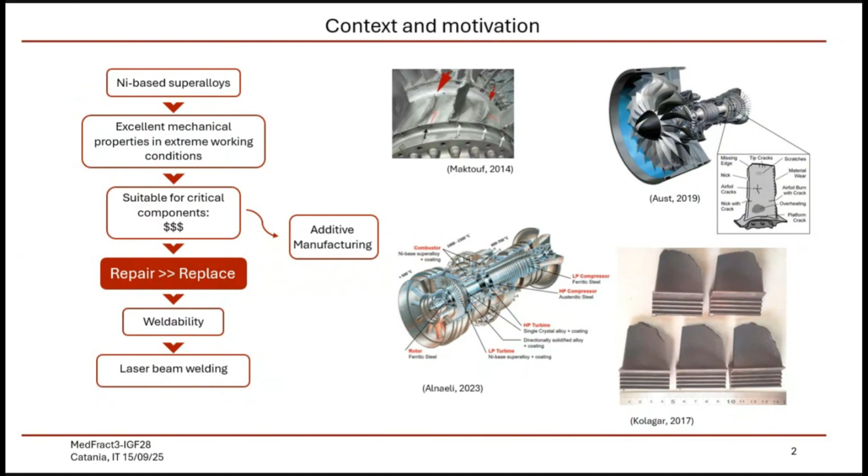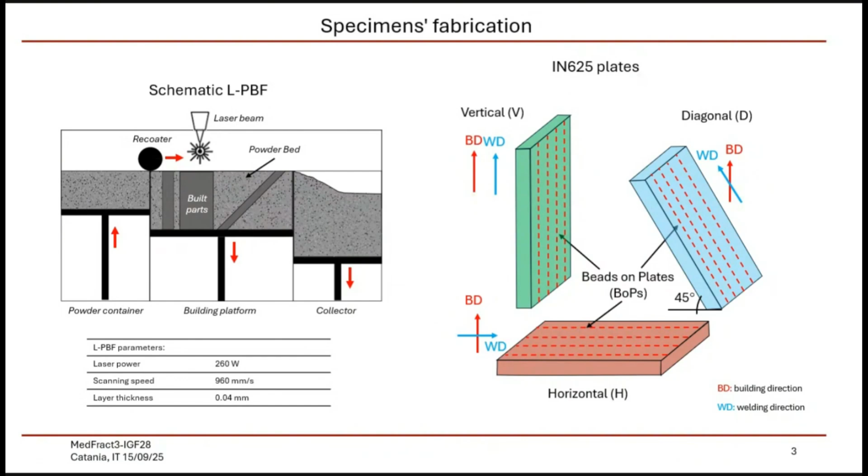And the 3 plates that we use were printed in 3 different building orientations: vertical, horizontal, and diagonal, with a 45 degrees inclination, which is the threshold to avoid support materials. On each of these plates, 4 different BOPs, beads on plate, were welded using laser beam welding.

So how were the process parameters chosen? 4 different combinations of parameters were defined with 2 factors, laser power and welding speed, and a 3rd factor, which is the power modulation. And for each factor, 2 levels were chosen. So for the sake of simplicity, we can say a maximum and a minimum value.

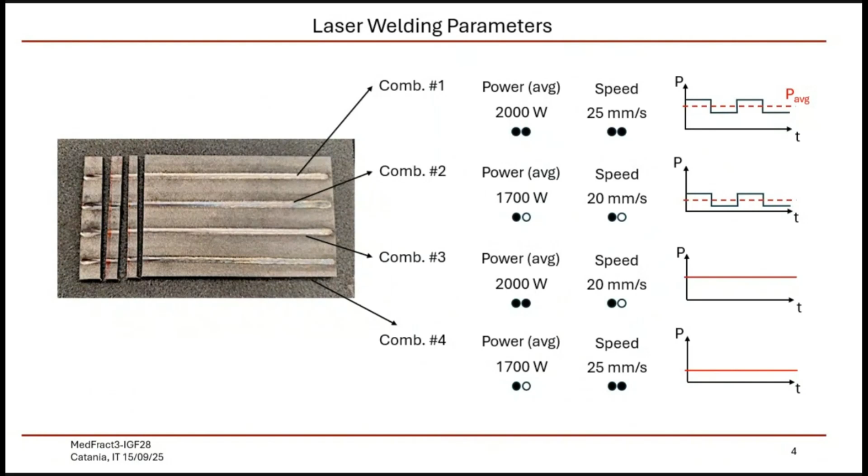In a nutshell, combination 1 has maximum power, maximum speed, and modulated power. Combination 2, minimum power, minimum speed, and modulation. Combinations 3 and 4 are in continuous mode, which means constant power. Maximum power, minimum speed for combination 3, and minimum power, maximum speed for combination 4. So we have 4 combinations of parameters, 3 plates, 3 building orientations. This gives us 12 different cases to study.

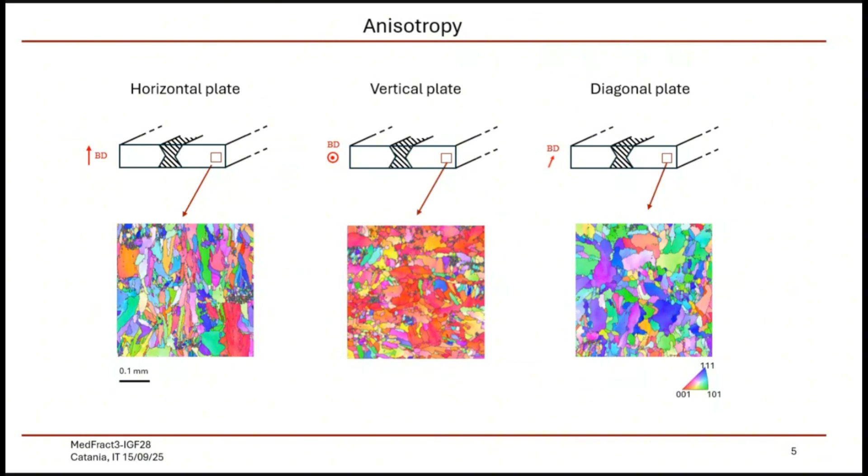And you see in the horizontal plate, we have columnar grains, elongated grains growing along the building orientation, quite long, while in the vertical plate, we have a more homogeneous distribution, and most of the grains are color-coded with red, corresponding to the 001 orientation. And then the diagonal plate has a situation which is halfway between the horizontal and the vertical plate.

What is important to say is that the joints that we observed, all the regions that we observed, also with microscopes, are of good quality. So limited amount of porosity, some rare liquated grain boundaries, but no solidification cracks and no massive defects due to the welding process. So this was the important first result.

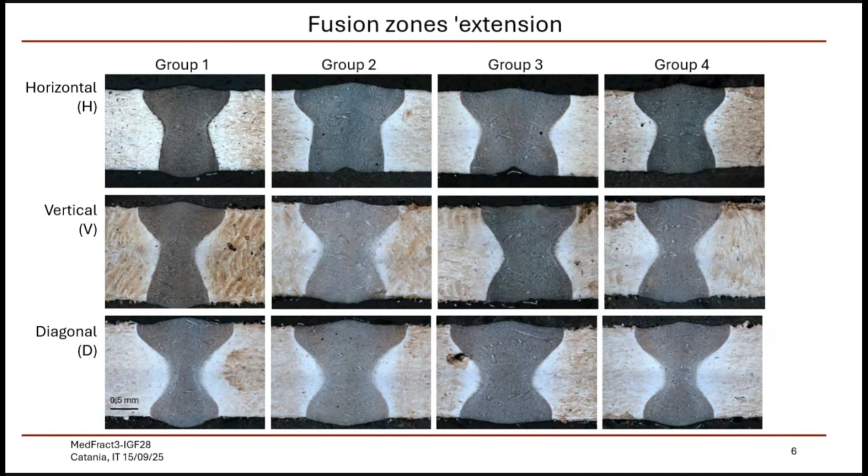Here we are comparing the fusion zone extension because often this is an indicator that is used to make comparisons between joints. So if we transform this matrix into a bar plot, we can see if there are some trends that relate the fusion zone extension to the parameters that were adopted.

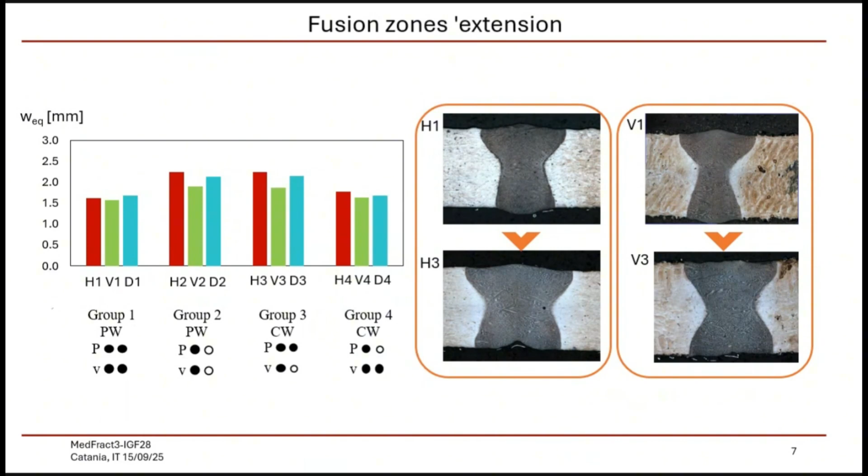And here you can see there is a trend related to the process parameters, but specifically to the welding speed. Actually, laser power and power modulation don't give a great contribution, not as much as the welding speed. And as you see, the lower the welding speed, the larger the fusion zone extension.

To restrict the field of investigation, we decided to study all the BOPs in group 1 and in group 3. So the main difference is the welding speed. Performing EBSD analysis on the cross-section of the fusion zone, interestingly, the structure of the fusion zone is the same. It depends neither on the building orientation nor on the welding parameters. So we have these elongated grains growing from the boundaries of the fusion zone towards the middle of it.

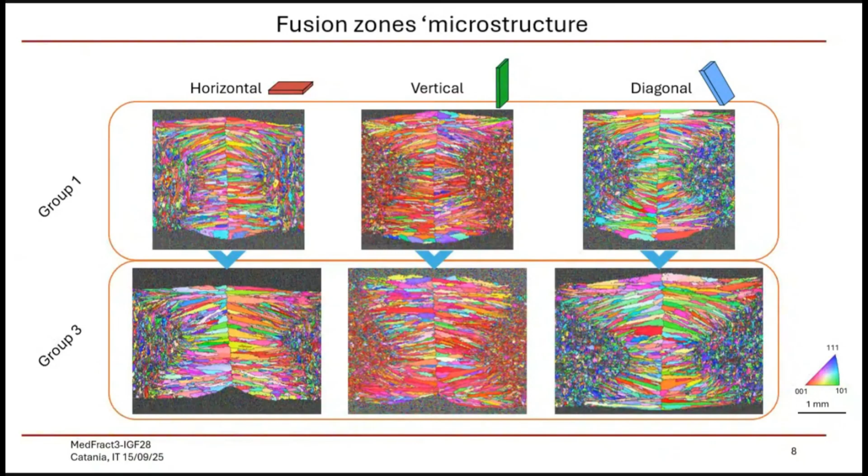But for example, you might know that when the welding speed is too fast, you might have the formation of equiaxed grains in the middle of the fusion zone, but we don't see it. So it means that within this range of process parameters investigated, we don't induce strong differences in the fusion zone microstructure, and not even on the microhardness.

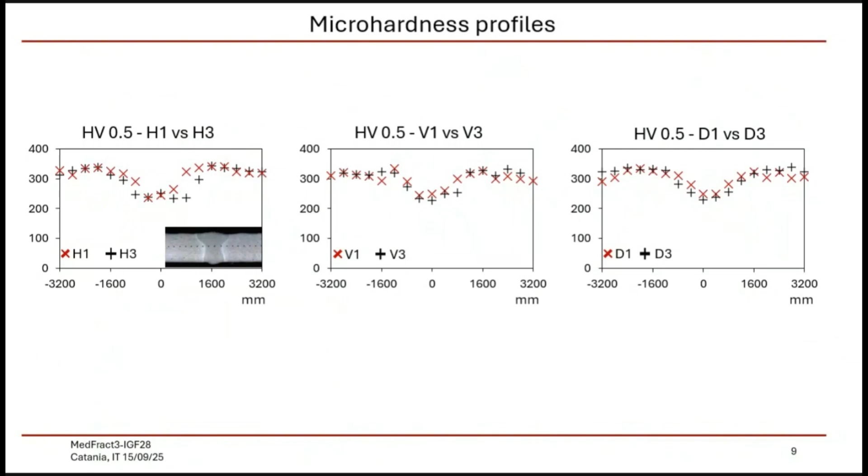These are plots comparing microhardness profiles taken from the middle of the cross-sections of all the BOPs of group 1 and group 3. So again, the main difference is the welding speed. And again, the profile doesn't change, it is not affected by the building orientation, and it's not affected by the welding process. The average of the parent material is 320 HV points, which is higher than wrought material because of the fine microstructure. And we have a drop corresponding to the fusion zone, and this is mostly related to the change in the grain size.

Some final considerations about the possible presence of secondary phases. Here we have a micrograph of the dendritic structure inside the fusion zone. First of all, you can see some circular pores that are probably related to trapped gas because of their morphology. And then you see there are some shiny particles in the interdendritic areas. These are claimed to be, in the literature, Laves phases or MC carbides, mainly niobium carbides, considering the alloy.

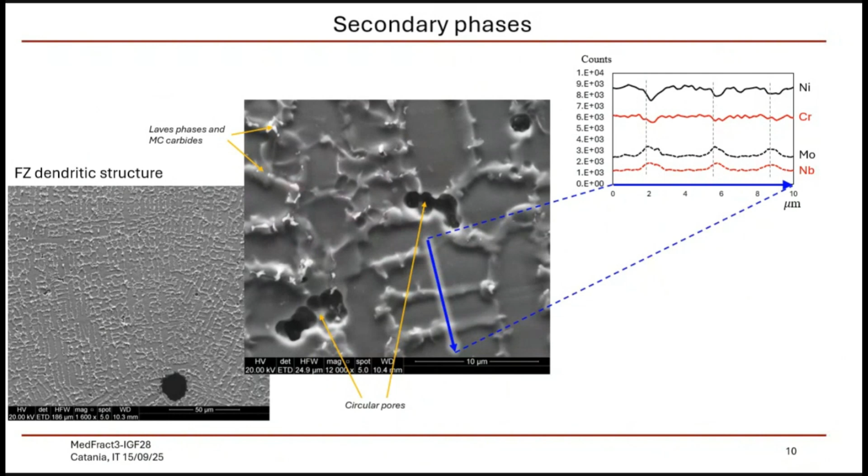And indeed, with EDS line scan analysis, we could see that in the interdendritic area, we have depletion of nickel and chromium and richness of molybdenum and niobium. So we decided to investigate these phases deeper with a TEM investigation. As you can see in this schematic, the samples were taken from the horizontal plate from the top surface, including also the fusion zone of the first BOP. So we have two samples, one from the parent material and one from the fusion zone.

In the parent material, we found the typical cellular structure, typical of additive manufacturing components. But this structure is completely removed in the fusion zone because the welding process completely resets the microstructure. But indexing diffraction patterns, we realized that only gamma phase is present, so we don't have any great precipitation of secondary phases, except for some particles, but they were quite rare.

So these dark globes in the parent material and these lighter grains in the fusion zone are rich in niobium, but too small to get a precise indexing of the diffraction patterns, so we couldn't identify them yet.

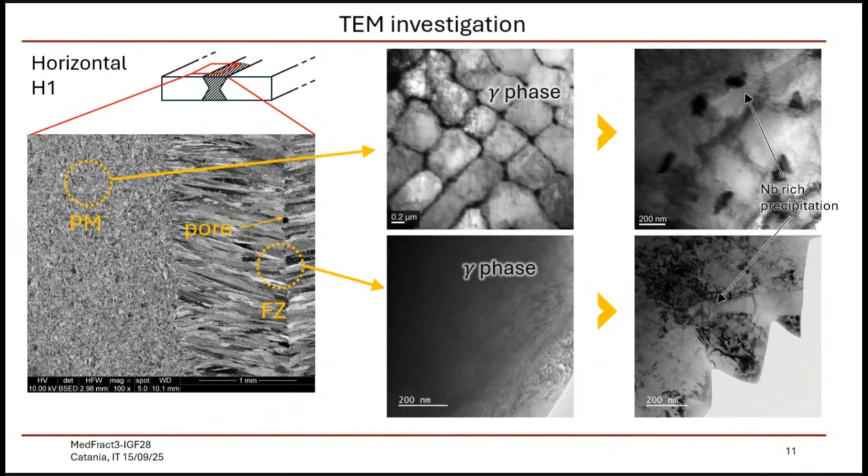So to conclude, the first important thing is that the weldability of IN625 is preserved, even if the fabrication process is additive manufacturing. The building orientation hasn't got a significant effect on the tests performed, and not even the process parameters, with the exception of the welding speed on the fusion zone extension. But we have to remember, this considers only these tests and the ranges investigated.

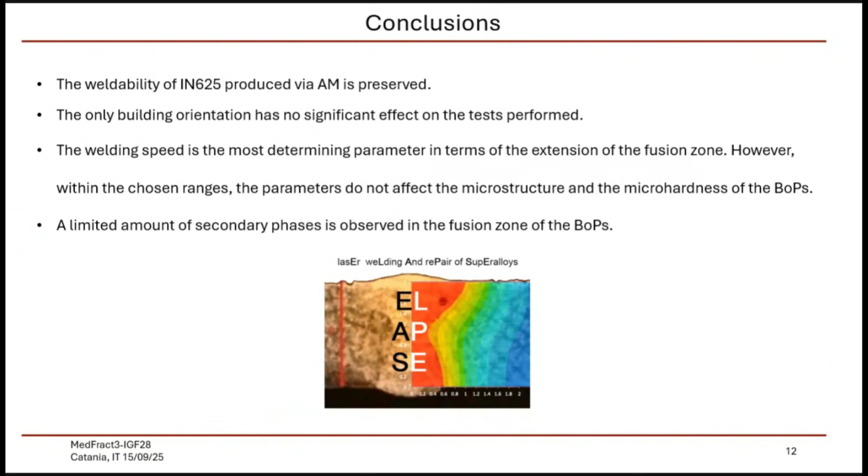And finally, we could find only a limited amount of precipitation of secondary phases in the fusion zone, and this is important to know because these phases, these intermetallics, are detrimental for the integrity of the joint. They increase the fragility, they might be a problem for the weldability, so this is also good news.